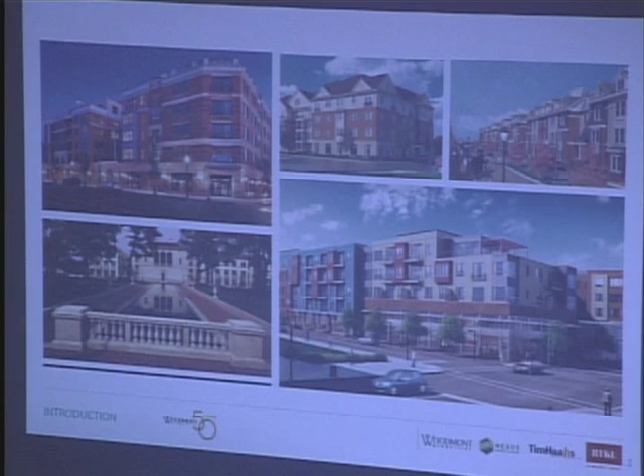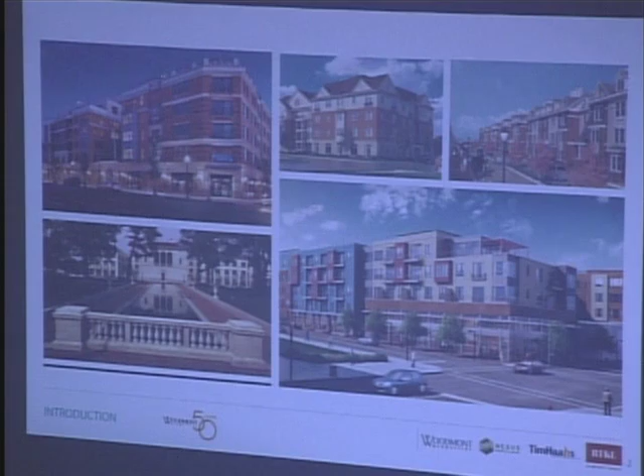One of the nice things about doing a project like this is that it's a big parking lot—it's generating lots and lots of traffic in your community, really with not too many other benefits. Maybe somebody stops at the local pharmacy on the way home, but there's a lot of folks coming in and out of town at the AM and PM peak. So we're not taking an old closed-down warehouse or a building that hasn't been in service for years and introducing all this activity.

In fact, what we're doing—and we have traffic testimony to this point—is it's really traffic neutral, but we're getting all of these other advantages.

The tax base, the exciting new retail, all of the shoppers who will be coming into the downtown, eating and drinking and having fun and spending their money here, as well as the purchase price, which is not insignificant, to the parking authority for the land.

We'll also be creating literally hundreds of construction jobs along the way and a host of permanent jobs as we go forward, not only with folks that will be full-time managing and so on in our part of the community, but also all the folks working in the retail and so on.

Just to demonstrate the level of commitment we have, we're on the agenda in August to transfer a liquor license in Metuchen that's currently not in use, because we really see this piazza and this retail as a great place for outdoor dining and a nice restaurant, bar environment. So we're already out there making investments on the hopes that we're able to move forward here quickly.

Just a short note, because I don't think we're going to cover too much with regard to all of my communities, a few quickies. First of all, you'll see the amenities package with our architect, Keith Campbell. He's actually flown in from Chicago to be here tonight.

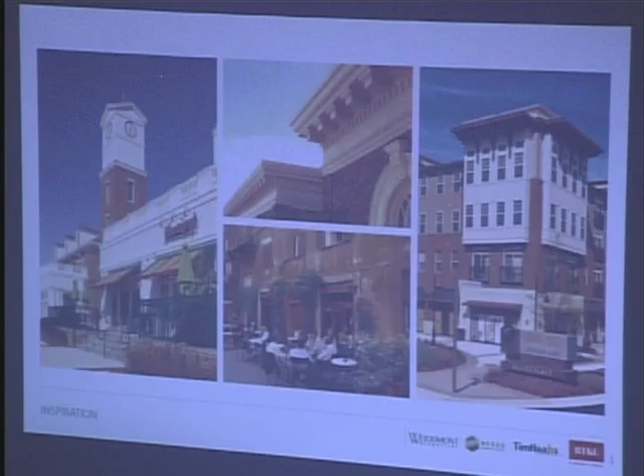A little more inspiration, upper left, buildings we admire. A nice example of red brick, carefully detailed masonry, projecting white trim, a nice deep cornice, a keystone at the top of each arch, white windows and mullion bars. It's a good precedent.

Again, another example of integrating private and public spaces, a projecting private balcony overlooking the public space, which you'll see examples of in our drawings. On the right is a landscape trellis. A big part of our design is an outdoor space above retail, and we're proposing a landscape trellis not unlike this one.

Lower left is another example of a very successful public space. It doesn't try too hard to do too many things, which is why we like it: nice low planting within planters, some mature trees providing shade, simple but high-quality paving underfoot. It hasn't been over-designed, which allows for a lot of simplicity, and simplicity allows flexibility, so the piazza can be used different ways depending on the event.

Lastly, this picture on the right shows ground floor residential units adjacent to a sidewalk. We've got that situation on both the east and west buildings in our design, which is actually a positive benefit to the public space. But exterior patios like this need to be protected, and we're proposing a solution like this picture, which protects the patio space with a low masonry knee wall, maybe a little wrought iron on top, and extra foundation planting that softens the transition between sidewalk and private space.

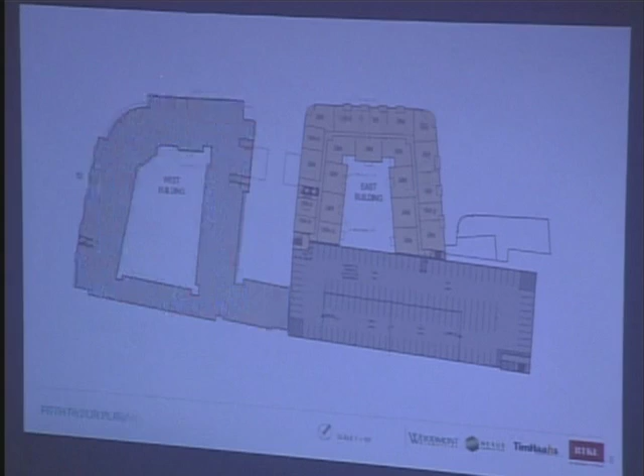The 5th floor is where the top floor of the east building is. It's 1 level higher than the west building. We have a total of 273 units across the entire project, 41 COAH units, and the rest market rate.

Building heights: east building 58 feet to the top of structure, west building 47 feet to the top of structure. Both buildings have a decorative parapeted cornice that hasn't been pinned down exactly yet, but probably 4 to 5 feet. That does a number of things for us, including screening any mechanical units that are on the roof.

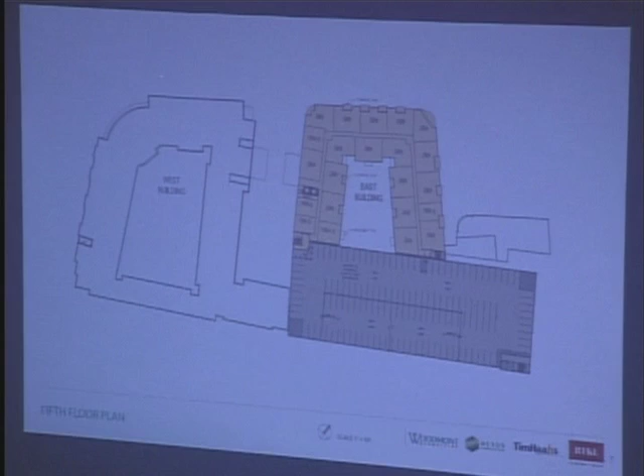It also allows, in instance of a larger event, if you were to close down Pearl Street and New Street, the piazza to kind of spill out all the way across the street.

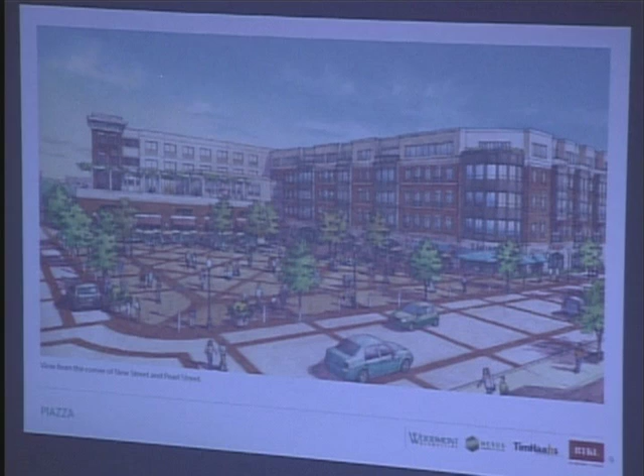Okay, we're over at the west building now, corner of New Street and Lake Street looking east. What we're looking at here are, in the foreground, the west building, with a little bit of the east building in the background. Again, we'll see this consistent cast stone base across the lower floor of both buildings.

The west building is 4 levels, so there's 2 levels with masonry above that, and then a composite panel at the top level. Like the east building, there are private terraces cut into the edge of the building. Up here you can see a little wrought iron rail at the quarter circle where it turns the corner. Some big terraces—these lucky residents get a lot of exposure to the street there.

Down at grade, these ground floor terraces show the consistent low masonry wall across the front here, as well as on New Street all the way down to the corner.

I should mention the coloration differences on these two buildings too. They're similar buildings, like maybe siblings—not identical twins, and we don't want them to be. You can see the difference in coloration of these projecting bays on the west building versus the dark color corners and bays on the east building. There's a slight difference in masonry color between east and west. We like that similarity and consistency, but we don't want it to be the same across the entire length of the block.

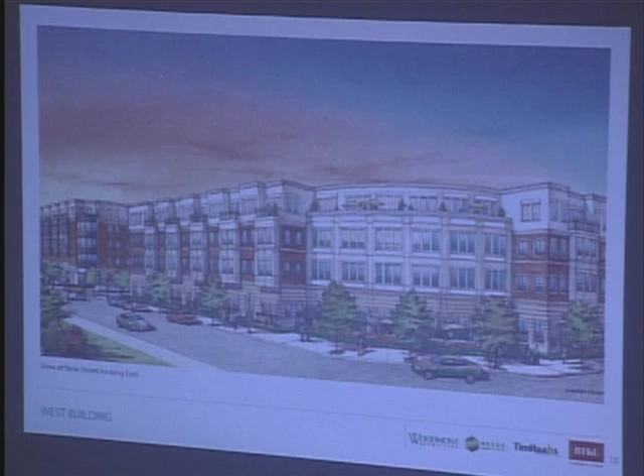Just a few words about sustainability. We consider ourselves not only stewards of the block and the urban design, but also stewards of the environment. To that end, I wanted to mention a few of the things we're going to be doing in terms of green design and sustainability.

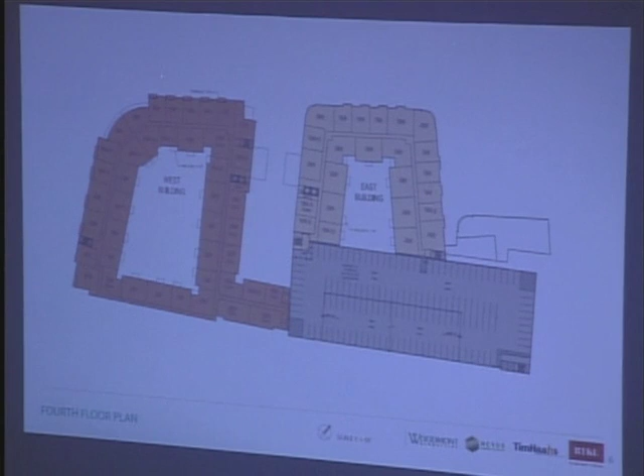Just one last question - is there a basement in either the east or west building? No basements in either building.

Okay, board members, your questions for the witness?

I do. Mr. Campbell, how do you access the rooftop of the retail building? That is through the amenity space, access off the third floor of the east building, so the path of travel is back to the outdoor space.

So you come through the east building? Correct. And is there an elevator in the east building between the first and second floor, and then you get out of the elevator on the second floor and walk to it? Yeah, there are elevators in both buildings that provide access to all floors.

Okay, other questions, board members? Just one other question about the rooftop terrace - do you anticipate that will be used by the retail use on the first floor, or patrons of those retail uses, or is it mainly for residents of the building? At this time, we anticipate it being used by residents of the building only, and it is accessed through what we think of as the fitness club or amenity space off of the third floor.

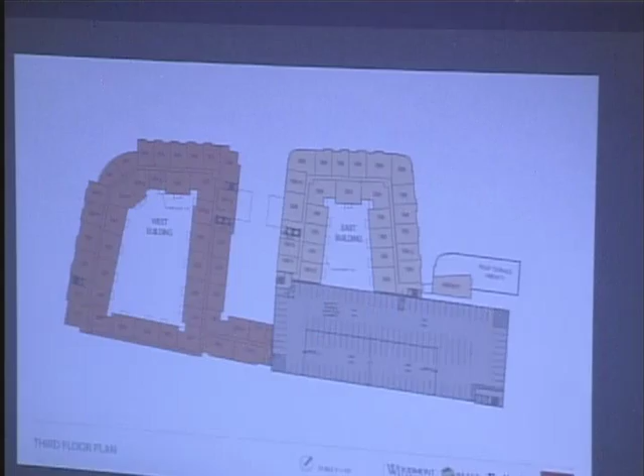There is access around each surface of the east and west building here, as well as Grove Street at the garage, so I think that's probably adequate for those surfaces. As far as if there's a necessity to get into the courtyard building, we have provided for the ability to get through the back house area into these courtyard areas. So then there's access in case. Okay.

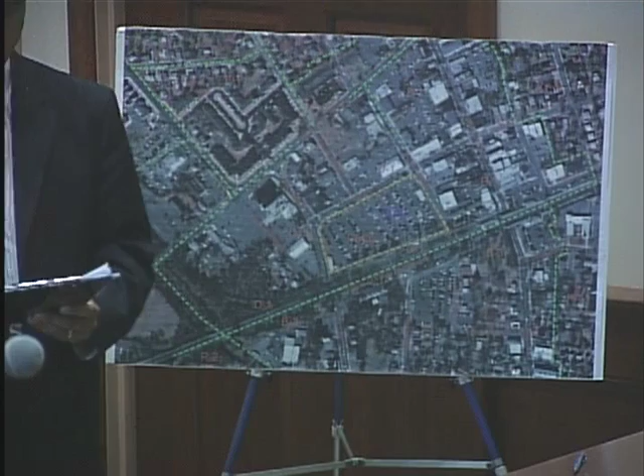To recap from the previous testimony by both Woodmont Metuchen and the project architect, the project proposes a mixed-use residential community in Metuchen consisting of the following elements: a 4-story west building with residential apartments, a 5-story east building with ground floor retail and residential apartments on the upper floors, a single-story retail building, a parking garage, as well as a community piazza along the northeast corner of the property.

The first exhibit I have here is an aerial exhibit, just to orient you where the property is. It's centrally located in the borough of Metuchen, along its eastern side. It has frontage on Pearl Street, to the north along New Street, to the south the railroad, and along the western side is the Lake Avenue right-of-way.

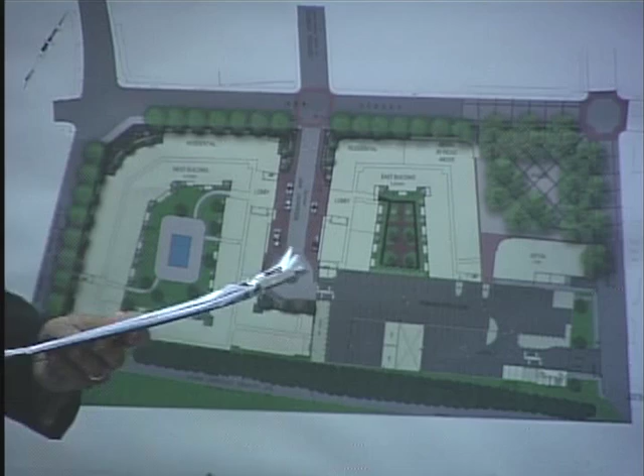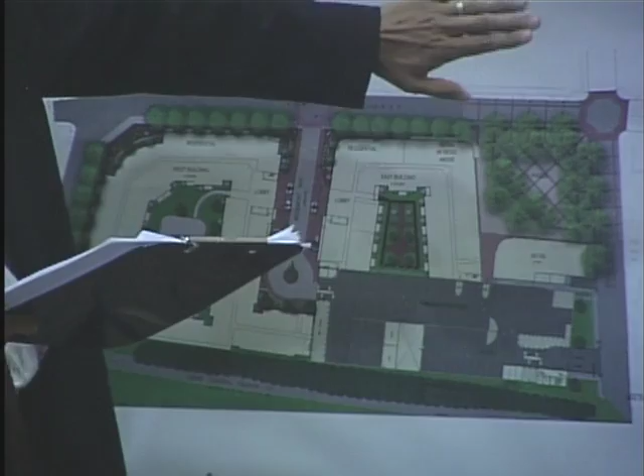So right now, the property is accessed via two driveway entrances: the first being directly opposite Center Street, the second located on the southeastern corner of the property near Pearl Street. The adjacent properties consist of the train station to the south, a ShopRite liquor building, parking lot area, as well as a precision repair building immediately to the north beyond New Street. Over to the east, there's a Wells Fargo building, as well as an existing restaurant and additional 1 to 2 story buildings, and across Lake Avenue there is an existing vacant retail building.

Now, as mentioned before by the attorney, we are here before the board this evening seeking two things: preliminary final major site plan approval, and approval of a subdivision plan for the property. Now I'm going to switch boards again, switch it to one more board.

We'll mark this A4, please, which is the subdivision plan.

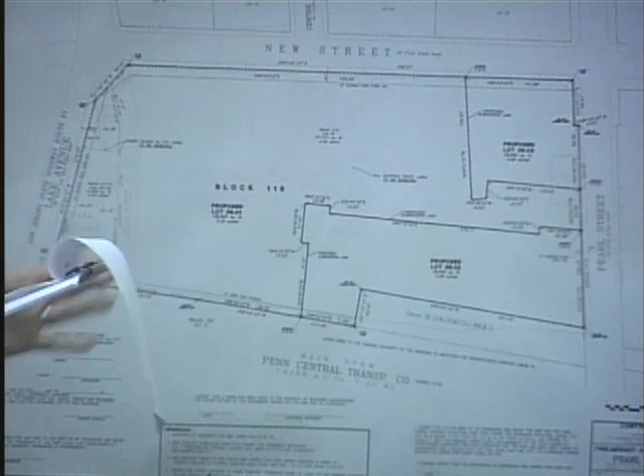Switch again. Tony, can you describe briefly what we're proposing to do? This exhibit was actually prepared by the project surveyor as a preliminary final major subdivision plan.

The project architect in his earlier testimony had discussed the proposed buildings to you. What we wanted to do is relate them to the subdivision.

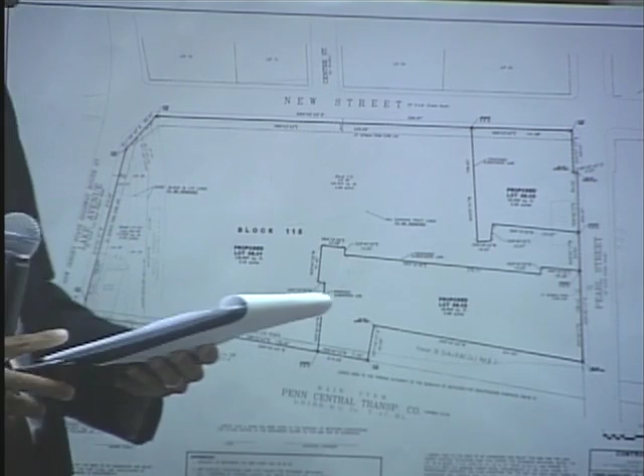The property is being consolidated; the proposal is to consolidate this property into 3 lots. The first is Lot 36.01, Block 115, and this particular block will include the 2 proposed buildings as well as a freestanding retail along Pearl Street.

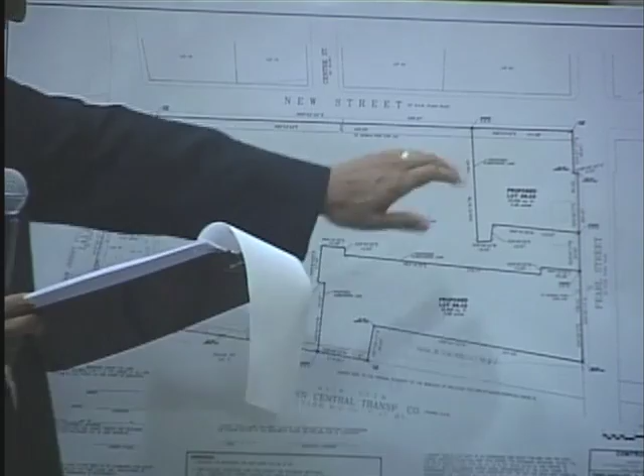Lot 36.02, Block 115, will include the proposed parking garage. And the remainder, Lot 36.03, Block 115, will include the proposed piazza area. I'd like to note that all 3 proposed lots will be conforming upon conclusion of the proposed subdivision.

Sure. We're going to keep nagging you - hold that microphone closer up towards your face, a little bit higher up, and they'll be able to hear you better. Okay, thank you.

So now I'm going to switch again, back to A3, which is the rendered site plan. That's correct.

In terms of the preliminary and final major site plan approval we seek this evening, this project is a planned unit commercial development, otherwise known as a PUCD, which is a conditional use in the D1 Downtown Development District. The Borough Ordinance, in section 11091 FB, puts forth 4 specific conditions the project is required to meet.

The first is that the minimum tract area has to be 4 acres, including any new street. The property as a whole is a 5-acre tract. Also, the tract has to have frontage on New Street and Pearl Street, which it does.

Third, the tract has to be within 200 yards of the Metuchen train station building on the northbound side, and the tract is within that distance. The 4th item is that a common open space in the form of a town green shall be provided in the approximate location shown on what's called a regulating plan. The project does propose a public piazza in that area as required.

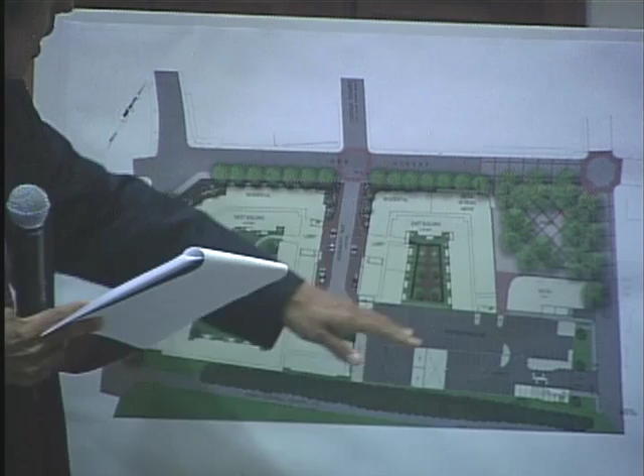It has a 40-foot minimum lot width requirement, and a substantial 596-foot dimension is proposed. We have a 100-foot required lot depth because of the D1 zone; 287 feet is proposed. The rear yard, 10 foot is required; 12 feet is proposed.

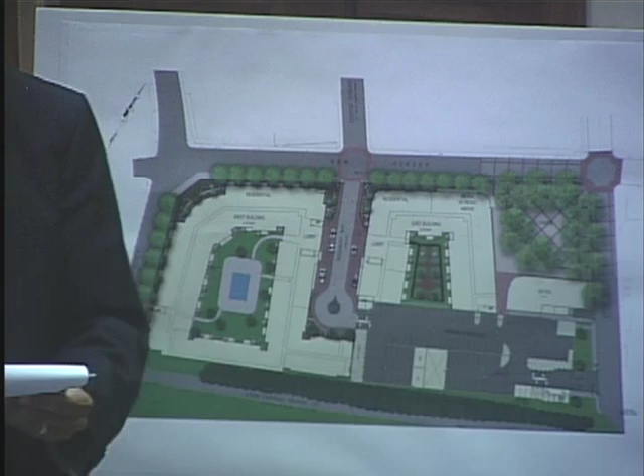There are curb setback requirements. The Pearl Street building, no taller than 2 stories, has a 10-foot minimum required - we propose that number, 10 feet. There's a building 4 stories or more for all streets, 20 feet are required, we propose that number. There's one other case considered for all other cases, which is not applicable in this particular project.

There's a maximum building coverage required as a percentage of lot area - 70% maximum, we propose 40%, so we meet that requirement. There's a maximum impervious coverage, also as a percentage of lot area, 90% is the maximum allowed in the D1 zone; 85% is proposed. There's a minimum public open space requirement of ½ acre, and we do meet that with the proposed public piazza area.

There's a maximum height requirement. Now I'm going to switch back a bit, and I need to bring back the first exhibit to clarify something.

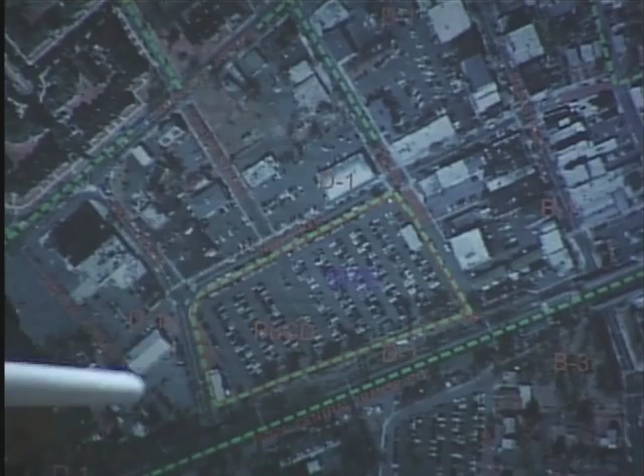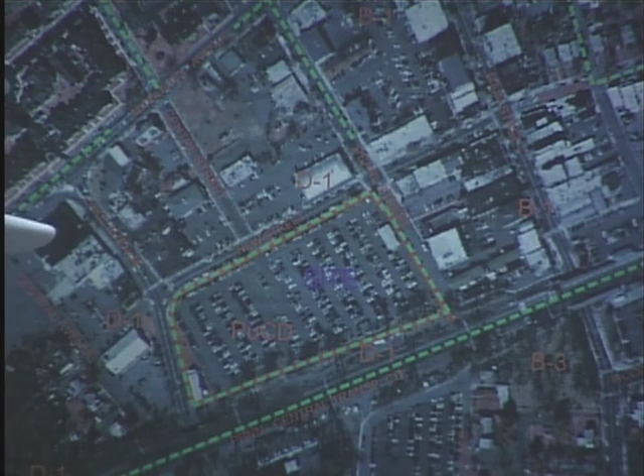In this first exhibit - the reason I mention this is the actual overall parcel for purposes of determining maximum heights. There are 3 subparcels, which I call parcel A, B, and C, as part of the regulating plan. The parcel A area is essentially the corner comprised of Lake Avenue and New Street intersection - there's a sliver of property there.

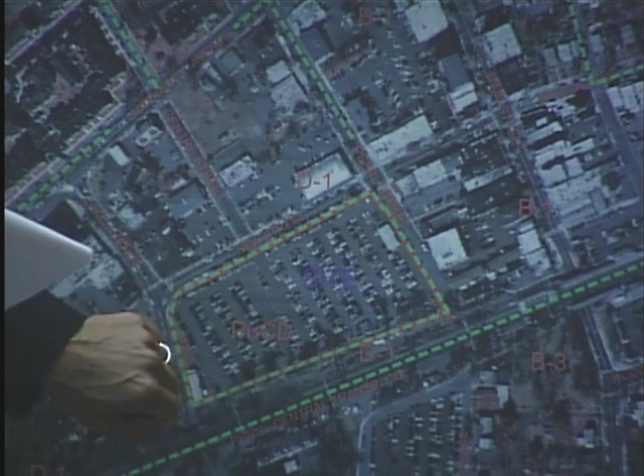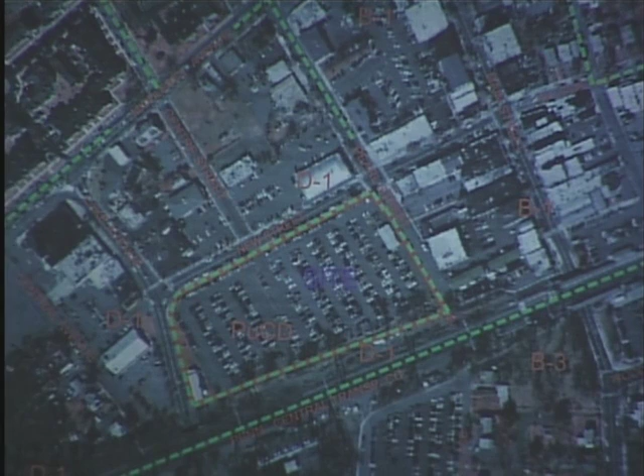Parcel B is a section located on the western side of the property; essentially it bisects the property. Parcel C is the remainder on the eastern side, and there's some differences there. So, for all three parcels, we do meet the maximum height requirements.

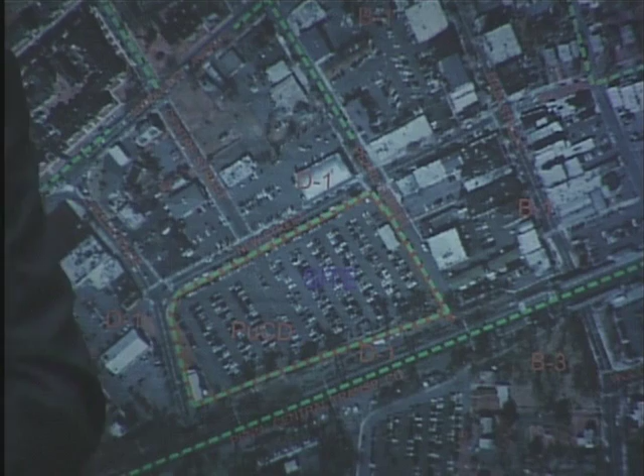Want to briefly go through the site layout? Sure. Let's switch back again.

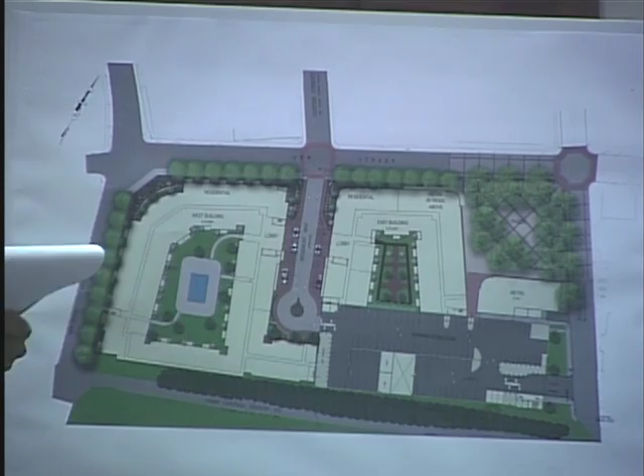In terms of site layout, both the west and east buildings will have main access from the proposed Woodmont Way, which essentially bisects the property and provides access to the fronts of both buildings. The retail component of the east building will have access from the east side, from the piazza side. The proposed freestanding retail building will have access from Pearl Street.

There'll be vehicular access to the proposed parking structure, located on the southeast corner of the property, from both Woodmont Way and Pearl Street. Parking for this development will be shared with commuters via this parking garage.

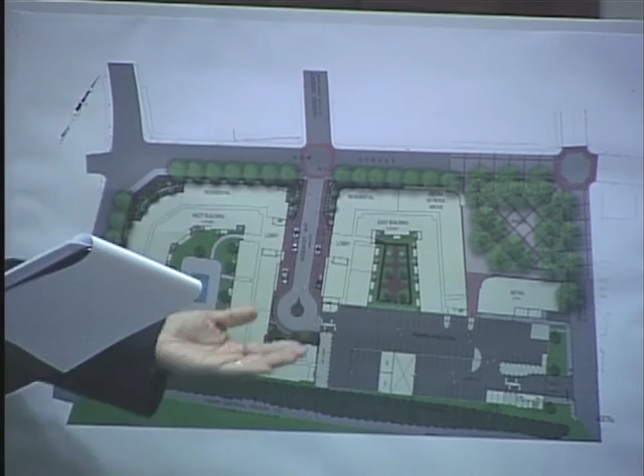There will be a 10-foot wide concrete walk and landscaped area along the Lake Avenue and New Street frontage. This concrete walk will be in accordance with borough standards.

In terms of garbage and recycling operations, these will be collected via a private service. There will be back-of-house service in both proposed residential buildings.

One other note: during construction, the site will have construction fencing with signage and scrim on it. We understand that this particular item will need a design waiver, and at this point I'd like to request a design waiver be granted for that element.

In terms of utilities, storm and sanitary sewerage, water service, gas and electric are all fortunately located adjacent to the site. Based on recent discussions with the borough engineer, it is our understanding that there is adequate capacity in terms of both water supply and sanitary sewer systems to serve the project.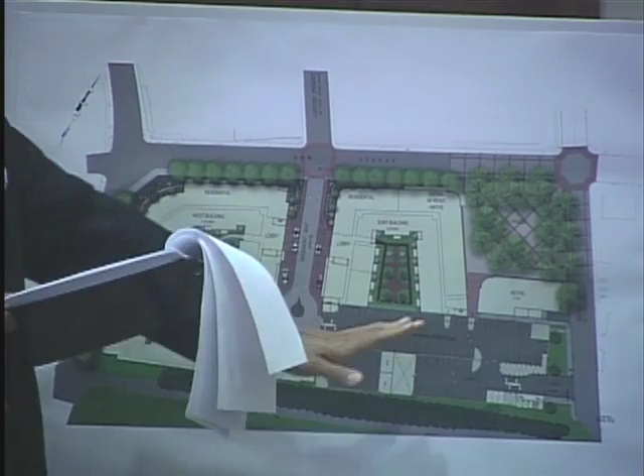Changing focus a bit to stormwater management and drainage. The topography of the property generally slopes in an east to west direction, primarily towards the Lake Street, New Street intersection.

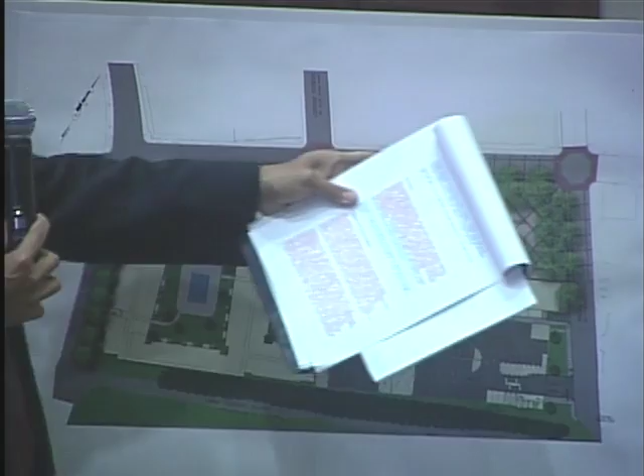What happens when it rains is runoff flows off the paved surfaces, goes through breaks in the curb along the edges of the parking lot, and ultimately into inlets that feed into a sewer trunk line that goes under New Street, flowing towards the west.

Since the property is considered a major development because it proposes to disturb more than 1 acre of area, it has to meet certain requirements, including what's called quantity reductions. In other words, you have to look at the volumes and peak flow rates of runoff for certain storm events to make sure it's not creating a negative impact to the receiving piping. So we looked at this analysis.

We determined that, based on a comparison of the existing and proposed impervious surfaces, meaning buildings and pavement, the development will actually reduce impervious coverage by 0.77 acre. That means approximately 15% of the overall site area.

That allowed us to quantify the overall volume reductions for certain target events, for example the 2-year, 10-year, and 100-year storms, which are part of the land development ordinance in town as well as state requirements. We determined that the development would reduce these runoff volumes by about 25% for the 2-year, 10-year, and 100-year storms.

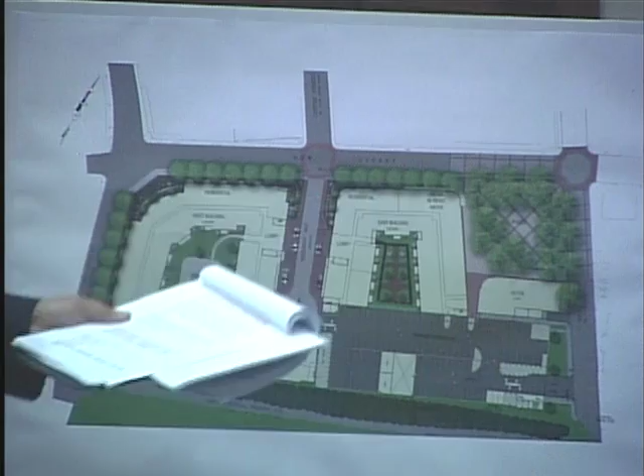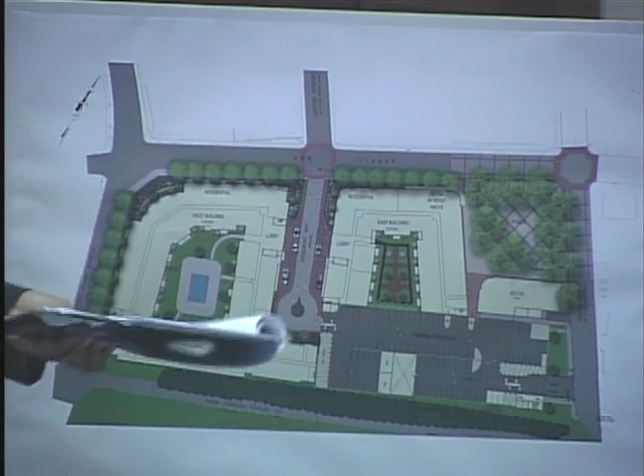Bottom line is, we looked at this system and determined that when you have substantial storm events, even connecting into New Street, assuming worst case scenarios where the piping underneath New Street had a surge in it, we weren't going to create a negative impact to the inlets. In other words, create a situation where you're creating geysers. That's always very important. We want to make sure we're not adding to situations downstream. Flooding is a very important issue, and we want to make sure we're not exacerbating any negative impacts.

So to conclude, we are creating a positive impact by not generating additional volumes and thereby worsening any flooding conditions.

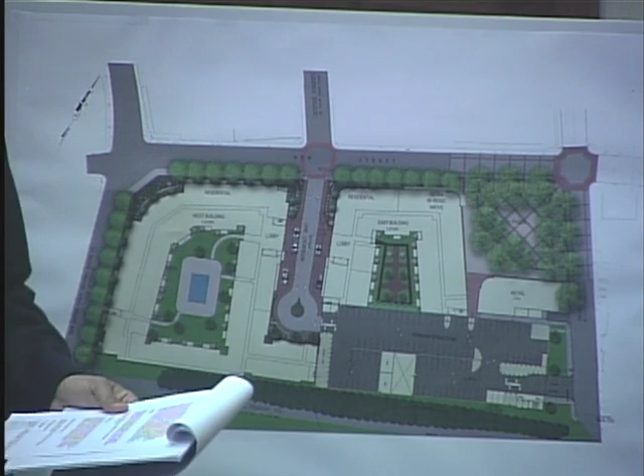And Mr. Castillo, to your knowledge, did the planning board engineer also review the plans relative to the stormwater management system? Yes. Did they conclude that our development proposal as proposed would in fact meet the stormwater management requirements of the borough? Yes, the borough engineer did agree with our statements.

To switch gears, I wanted to discuss briefly lighting. The project will utilize essentially a Main Street style street lamp in accordance with borough standards, and final placement of these lamps will be coordinated with the borough planner.

Also in terms of landscaping, the landscape plan as shown on our plans at this point is illustrative, and we will coordinate once again with the borough planner to finalize placement of these street plantings for the project.

And in terms of the piazza itself, Tom Carmen, landscape architect from Little Barrow, will provide some descriptive testimony regarding it.

Did you have an opportunity to review an engineering review letter from the borough, from the planning board's engineer? I did. Do you have any comments to put on the record relative to that letter? In general, we took no exception to the letter. There were some minor items we did take exception to, only a few of them.

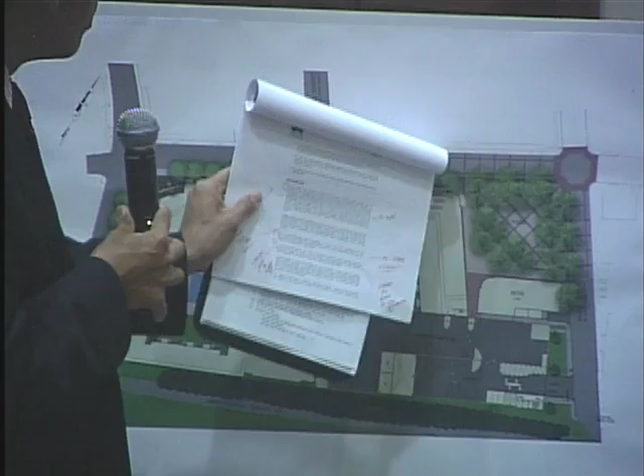The next is, I would say, clarification and perhaps a comment on number 3 regarding the width of pavement of both New Street and Pearl Street being milled and overlaid. So Tony, if you could describe what we're proposing as it relates to the milling and overlay. Right now, the proposal is to perform mill and overlay in the areas along Pearl Street and New Street that are immediate, that will be given additional surface treatments adjacent to the piazza areas. We feel that at this point, the balance of Pearl Street and New Street, the condition of that pavement does not merit a full mill and overlay at this point, based on its current condition.

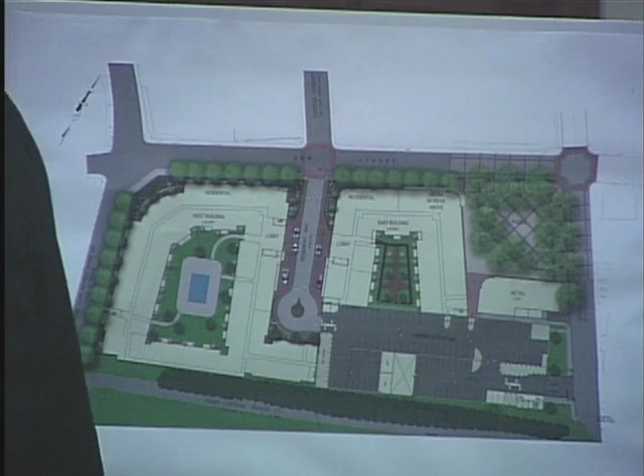So you're proposing this with respect to New, and what about Pearl? All of it. All right, so all of Pearl you're proposing to mill and pave or install improvements in the roadway, is that right? Yeah, Pearl from the end to New. Right, and New—

Is it your proposal that the areas shown in gray, not outlined in some fashion, are adequate and will remain that way as a result of construction, and that the applicant shouldn't be required to pay for milling and paving of those areas, is that right? That's our position. Same position on Lake Avenue? Same with Lake Avenue. Well, Lake Street. Lake Street, right.

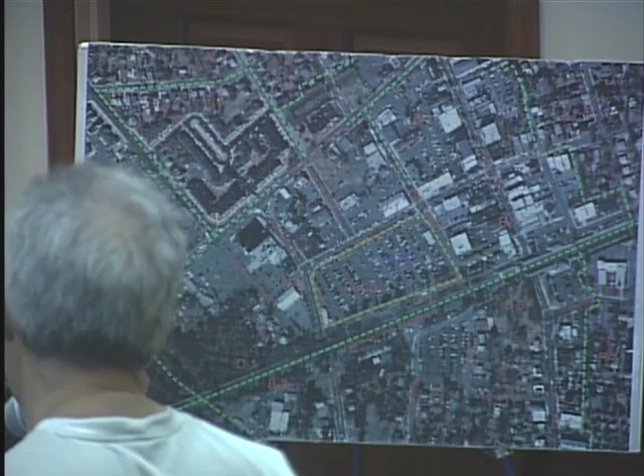So will that be addressed at some point through this? I guess the concern would be to do all this nice development of yours, and then your neighbors down the road will also be constructing and placing all this new development into an area which already has a chronic flooding problem. Not to mention the issues about moving heavy machinery over the road. I know you're talking about remilling the surface, but all that activity may damage the pipes further underground. So I'm just raising this as a concern, wondering if there's been consideration of those cumulative impacts that might exacerbate it. You just don't want to have a problem when you go ahead. It sounds like a nice development.

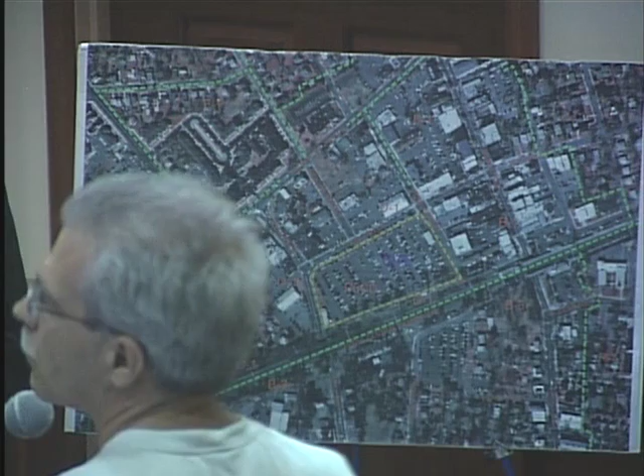No question that we'll have to give it a little bit more of a look, but what I can tell you too is you're only as good as the next pipe. So to the point earlier, you're surrounded by bad pipes, unfortunately, my friend. If we were to put in a new pipe that was 50% bigger than the existing pipe, if it flows into an 8-inch pipe, it's going to surcharge no matter what happens. It's a system.

Well, the good news is, just local knowledge, you're in luck in a way, because just on the other side, past Borough Hardware, is where much of that water flows into the Dismal Swamp. So it's not that far to the ultimate egress of the water. And there is a plan to improve that. In fact, we've already debated this fair share issue. Yeah, and I don't know the background, so I'm not going to get into that. I know some of the applications downtown to bring a bigger quantity there.

So where is the boundary and who does what? It sounds like an issue I'd like to bring to your attention, not being from the town. You may not know it's been a chronic problem. Just behind you on Main Street, any half-decent rainstorm and Main Street closes, so whatever pipe is behind you floods. You've got flooding behind you, flooding around you, you're kind of a little island there, and then you're going to run all this equipment over the street. Good luck with that.

Thank you. Other members of the public would like to ask questions relative to site engineering? I want a discount.

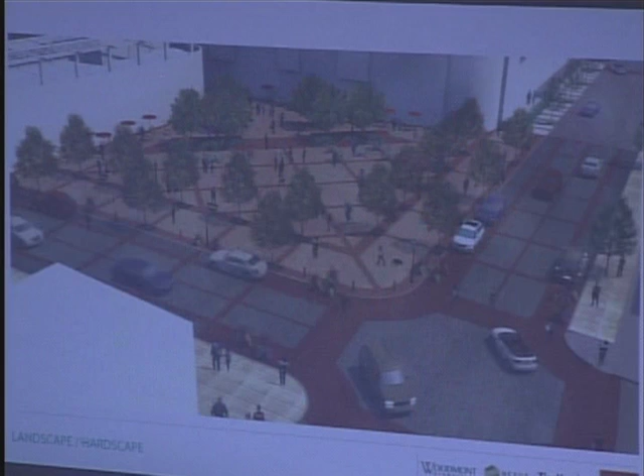This is a perspective image looking back at the architecture and the retail, at the intersection of New and Pearl. This shows how we're really extending that piazza out to the roadway.

The patterning of the pavement in the piazza extends out, and the patterning within the road designates parallel parking spaces as well as the crosswalks. This textured pavement within the roadway relates to the earlier discussion about milling and repaving.

What this is, is a specially formulated polymer cement product that has aggregates, pigments, and engineered fibers in it. It's put down in this pattern over the asphalt, and it's an extremely durable surface, durable to freeze-thaw, petroleum, and salts.

It's used in a number of applications throughout the state, including Chatham. It's actually been established in Jersey City as their standard for crosswalks, medians, and decorative intersection treatments like this. That one intersection in Jersey City sees about 60,000 cars a day going over it. It's also used by NJDOT, and we all know how rigorous NJDOT is with their detailing, so it's a great product for this.

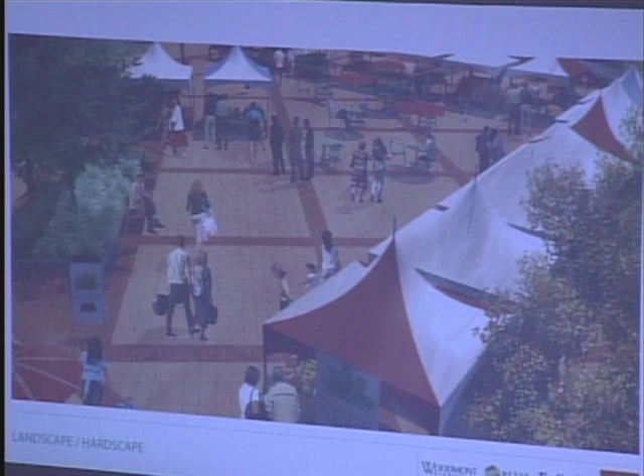Then a larger scale event, again with flexibility being one of the key components to the design of the piazza. A larger scale event could be something like this, where we're closing off New Street right in this location.

And it could be closed off down at the end by Central. So just this area could be closed.

Could be a street fair happening there with some food trucks along the curb, some street fair tents, and then potentially set up a stage in this orientation.

Again, flexibility—there are many locations that a stage could be set, but this orientation right here, we felt that Pearl Street could remain open and provide access to the garage.

Have a stage, line up some chairs, the retail being vibrant, people milling about.

Another possibility would be to close both streets down. Certainly a stage could be located here where you could fill the whole space with a lot of people enjoying an event.

A smaller scale event, keeping the roads open—a stage could be located right here, and some seating directed at that.

Flexibility being the key, and I think we've really achieved a good balance of that here.

The next view would be from the food truck over here, kind of looking back at the stage.

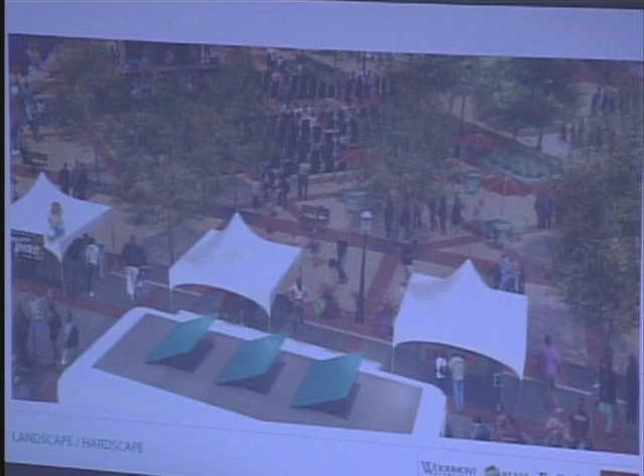So right here, we see New Street in the foreground, that flush curb that we spoke about, the paving pattern delineating where a parallel stall would be.

The Metuchen-style light, planters, tree grates, taking that vehicular pavement and carrying a similar patterning into the plaza space.

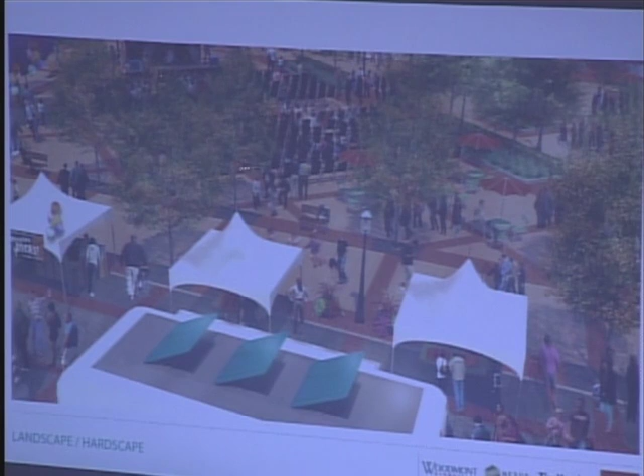The movable seating or actual arranged seating for an event in this location right here, looking at a stage. Retail frontage over there, and then the honey locust with a simple underplanting.

So in general, that concludes my direct testimony on the piazza. I think it's going to be a great space for the community to really enjoy and have a bunch of different events, the Junebug Festival and all the different things that happen.

Good, okay. Board members' questions for this witness? Right now—and I don't know, Mr. Carmen, if you're really the person who can answer it—but right now we have on-street metered parking.

None of your lovely renditions show the meters. Are they going to be removed? Is there going to be on-street parking? Do you anticipate on-street parking available on Pearl and New Streets?

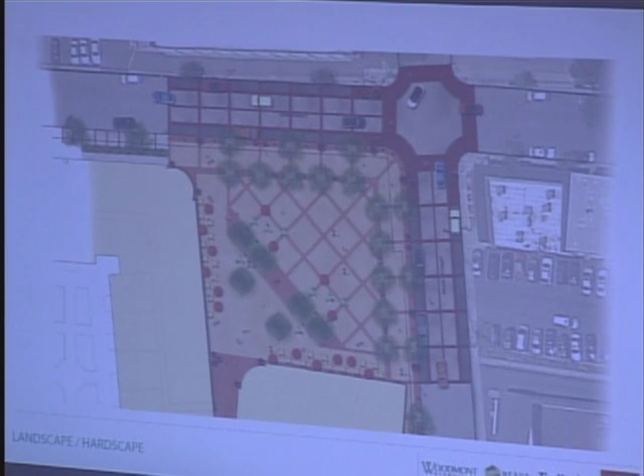We do envision that this would be parallel parking along New and along Pearl, and the parking meter could be yet another element that creates that kind of edge treatment. So in some of these locations, maybe instead of the bollard, it's the meter there.

So if the meters remain, you would work around them? Because obviously the ground treatment, you're showing going to the other side of the street. That's correct—this curb line right here would be the existing curb line.

So today there's parallel parking, I believe, on New Street, and that would remain. It's just that it would be detailed on the ground plane differently. Right, okay.

Okay, thank you. Okay, board members, other questions for this witness?

Okay, seeing none, I'm going to open the public portion. If you have questions regarding the landscape architecture, please come on up and share them with us.

My name is Henry Chang. I live at 112 Lake Avenue. I'm with the Arts Council. We're very excited about this open space for arts events within town.

I have a couple questions for you. The first was related to how many people you would envision could fit into that central area. For instance, with that rendition of the stage and chairs set up, what was an approximate volume of people?

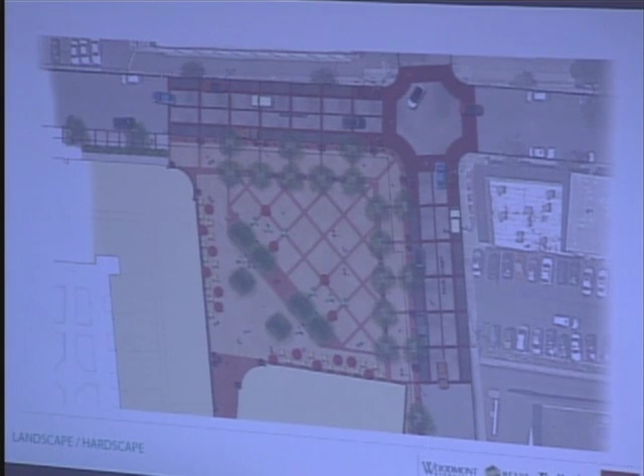And maybe during a performance, some people's line of view may be impacted by the tree, but I think we've struck a good balance in terms of that.

Sounds great. Can you talk a bit about the paving materials? You mentioned pavers as the stripe aspects, but what are the larger beige areas? This whole area is a paver field made up of two types of paver - a more neutral colored, lighter toned paver, and a reddish brick-like paver with a smaller module in the pedestrian area.

Let me add to that. The neutral tones will be closer to a 1 by 1. I'm on the Downtown New Jersey Executive Board, and as everyone moves forward with sidewalk improvement programs, a lot of brick or smaller paver styles create an uneven rattle with a stroller, skateboard, or bicycle. So we like the idea that some larger spaces will use a bigger paver to create a more even space for folks riding a bike or pushing a stroller.

And you're suggesting a 1 by 1 foot dimension? Yeah, it would be 10 inch by 10, something like that. The red banding would be more traditional brick.

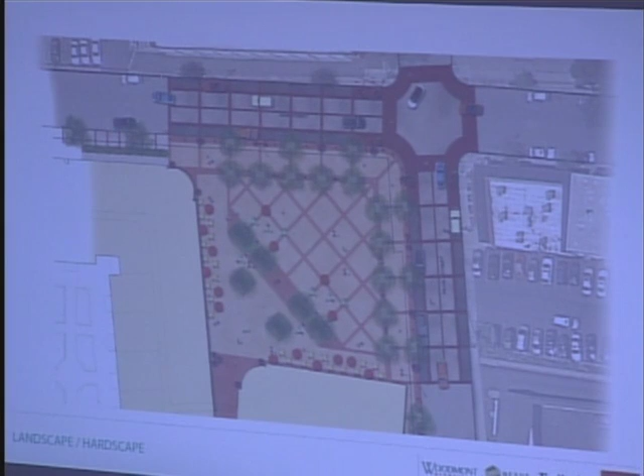Okay, and lastly, this maybe is not landscape per se, but it relates to the piazza. As far as height, it looks like it's just the one sloping space down toward the street side of things. Was any consideration given to slight variation in height, or a little step up, little artificial benches where you can sit, where it perhaps delineates the retail space or the restaurant bar area up top, like you see in a lot of public places similar to this?

The answer to that, I think, lies a lot in the liquor license laws. If you're going to expand your liquor license outside your space, it has to be carefully delineated. When you walk in Manhattan or Hoboken, they either have like a velvet rope set up, or they get a fake picket fence or whatever. So we want to create as much flexibility in that area if they want a little bit more or a little bit less. For instance, in one of our projects out in Green in Morristown, one owner did 2 restaurants, and to our surprise, did great outdoor stuff at one and decided he didn't want it next door. It just didn't fit his whole motif and what he was doing. So the conversation we've had for the last 18 months has been about flexibility.

No steps, no permanent benching, because we're going to all live with this for 30 years. And in 20 years, who knows what might be all the rage. Put a fountain in the middle or that kind of thing.

Yeah, I would agree with the general sense that you want to have flexibility. I guess the only point, I'll phrase it as a question: is it prudent to give thought? We spoke to, 330 days a year, it's for pedestrians. You want to draw people in to hang out in the space. And usually, as a principle of design, variations in height, even if they're slight, create that coziness, that intimacy in pockets of space where you can be, even if you're 3 feet above the guy sitting right in front of you, you have that delineation, and you're not right on top of each other. So it's just something I would put out there. It's definitely an interesting thought. I think we'll look at it. If we can do it without moving away from the flexible concept, it's something to think about.

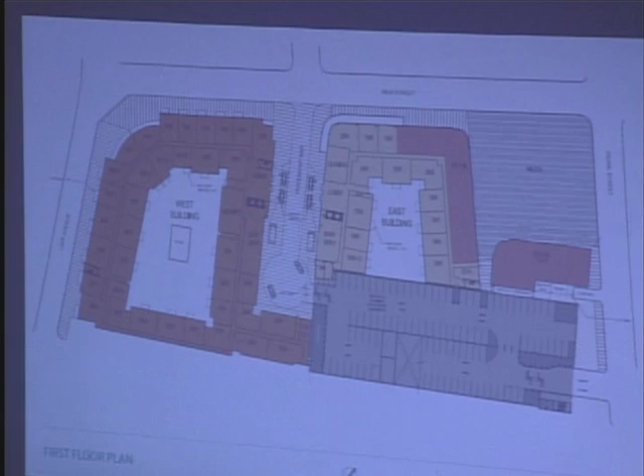At the entry and exits, it's very important to have approximately 40 to 50 foot candles. You have to make sure that, especially upon entry, there's a light transition—so when you go from sunlight into a parking structure, you pass through an area that's somewhat well lit before proceeding into the garage, and that way you avoid the blind spots you typically get.

The overall height—I mentioned 14 foot, 11 foot on a typical level—so from grade to the top level parapet is 56 feet 6 inches. The top level parapet is 3 foot 6 inches above the top level of the parking deck. That 3 foot 6, or 42 inches, is the code-required fall protection.

We are proposing, which can be spoken to by Nexus a bit more, an operational office in the northeast corner that would basically secure the garage, with the garage manned on a 24-hour security basis, as well as active security measures. There will be cameras in the garage as well.

The pedestrian connection - I mentioned each stair tower as an access point, with 2 elevators required per the requirements of the use and demand of 750 cars from a residential and commuter standpoint. One of the elevators will accommodate a stretcher per accessibility requirements.

The pedestrian connections to the residential are in 3 locations: one at the southwest corner to accommodate access on each level of the parking garage to the adjacent west building, and two on the northerly portion to accommodate access to the east building. In both cases, they access into a small lobby corridor space.

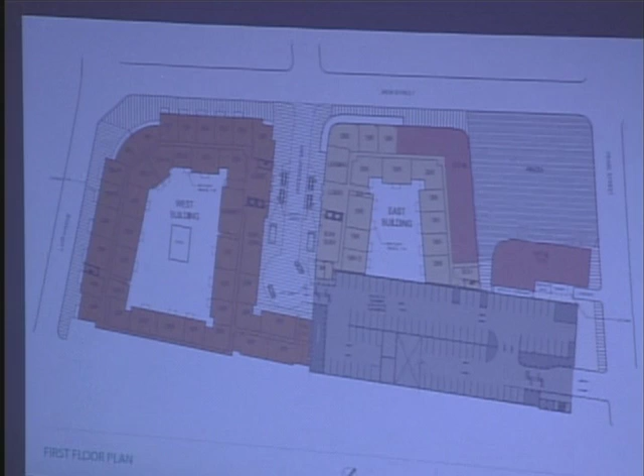Moving up the typical levels, the vehicular movements are fairly straightforward. You come into the garage and go up the ramp. On your way up, you make right-hand turns to park. On your way down, you circulate in a counterclockwise fashion - very user-friendly. We try to minimize as much as possible any vehicular or pedestrian conflicts within the parking garage.

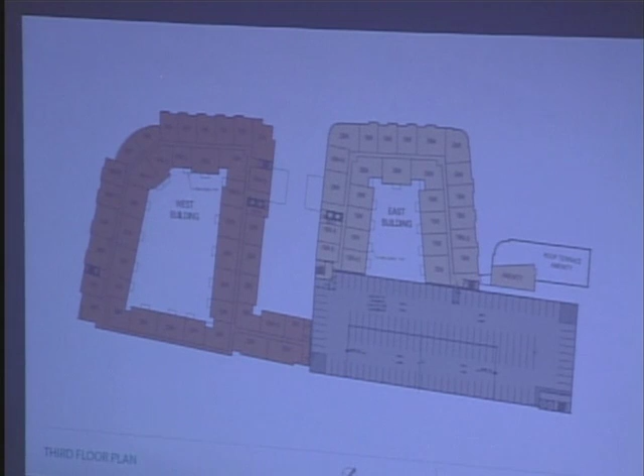The interior wall here is a stack wall. We try to maintain as many openings in it as we can from a structural standpoint, so that if you're on the ramp, you still have visibility down to the flat bay, and you feel comfortable within the parking garage.

From an architectural and elevation standpoint, as Keith mentioned earlier related to the architectural intent, the parking structure is contemplated to be a precast parking garage. The precast materials contribute to sustainability. You can see in this corner it's typically going to be a buff color precast with thin brick inset, strategically located at the corners and stair tower elements.

The other thing I wanted to mention is what's called a shear wall. You may be in parking garages where you see internal walls, but to enhance passive security measures, we try to minimize interior walls as much as possible and bring those out to the exterior as an architectural element. You can see the verticality in the architecture at this end piece, giving substantial architectural intent - the stair elevator tower in the back, and the vertical shear wall on the exterior. So inside, you essentially just have an open wall, really no columns and no walls, which is great from a security standpoint.

We would expect, although not designed yet, some signage identifier for the parking garage. As you come down Pearl Street and Woodmont Way, we'd want the public and commuters to visibly see very tasteful parking signs. Although not shown here, that is one element forthcoming in the design.

Mr. Chair, if possible, before we take questions, Mr. Germano from Nexus would complement Mr. Helmer's testimony. Perhaps I could have him speak operationally and then take questions about the parking structure as a whole. Counsel, do you have any objections?

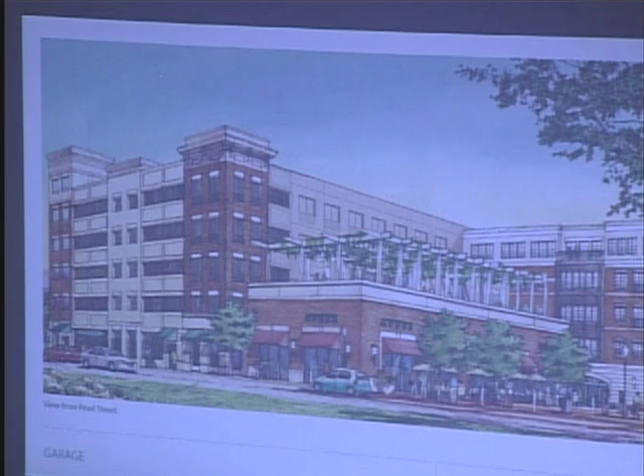No objections, if it's all right with you. Well, I see Mr. Germano was only scheduled for 5 minutes - that's the only reason I'm considering it. It's okay with you, it's all right with me. Be brief - we'd like to call Dante Germano. None of these times have been... Eric, can we ask questions? We can do whatever we want. The idea is the board isn't supposed to consider new testimony after 11, so we can make a brief extension. Let's hear from Dante, and then if we have questions, let's do the questions. I know we'll go over the 11. We all have questions for Mr. Helmer.

Before we move on, I just want one question from Mr. Helmer regarding the stall sizes of the parking structure. Currently in the parking garage, the stall width is 8'6", which is typically standard size within parking garages. In many garages we've done throughout New Jersey accommodating commuter, residential, or other uses, the borough requires 9 foot, so that's an area we would require a waiver for. The stalls are 8'6" by 18 feet deep, and the 24-foot drive aisle adheres to the borough ordinance.

Okay, don't go anywhere, Mr. Helmer - we have plenty of questions, but we'll hear from Mr. Germano.

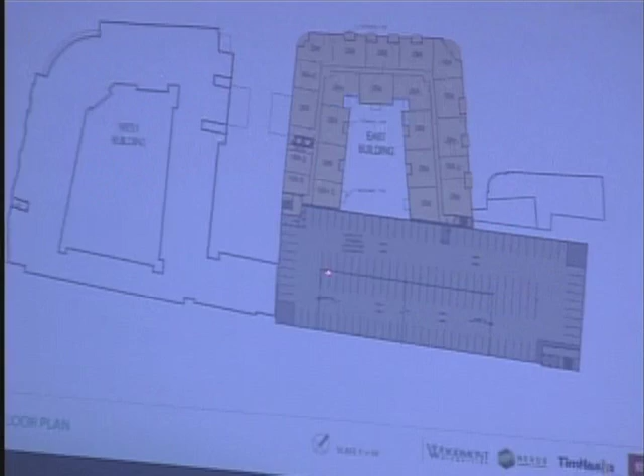The other thing to mention is that on the top level, the light fixtures, we do not mount those around the perimeter. We mount those on the interior column line. Okay, so we won't be seeing any shoeboxes up there anytime soon. No, it'll be maybe 15 foot high, probably about 4 or 5 of those, but they're definitely not mounted on the perimeter of the garage, from a visibility standpoint as well as light spillage.

Okay, very good. I have another question. Will there be charging stations for electric cars? There will be, at the ground tier, in this vicinity, right here, there will be charging stations.

What about rental cars, Zipcars, or whatever - will there be any of those? At this point, I don't believe so. I could be wrong, but no, the answer is no.

There will also be bike storage within the garage, with convenient access from Woodmont Way, right in this area. So you have bicycle storage, and then you'll have the electric charging stations right across the way.

I understand that the structure is designed so that if New Jersey Transit extends the platform in the future, there would be a way to create access to that platform. That's correct. The design of the main stair elevator tower, we'd be looking at that fairly closely to determine the provisions for that tower to have access to New Jersey Transit in the future.

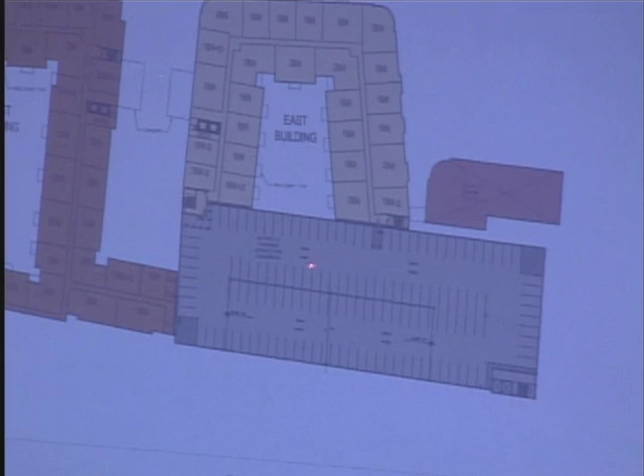Regarding the flat side of the garage: if you look at a typical level, the ramp to go from one level to another is on the track side. So if I was driving my vehicle, I'd come around on the flat section, then go up the ramp to hit the level above. What I meant was that this ramp is a compliant parking ramp per slope.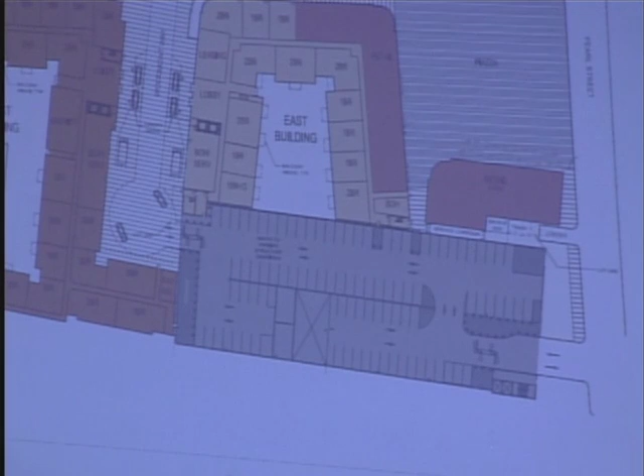Where we've allocated the bike storage, that's a solid wall in that location, so it would be a combination of the two. As far as the piazza area, we'll have some bike racks for those riding up. But on days when you need protected bike shelter or storage, would there be facilities on the ground floor proximate to the retail, so you could ride in, park your bike, and walk out to the retail space? That's something we can definitely consider in that area, even if we split it up.

So in the northwest corner, you're really accommodating the residents, right? And in the northeast corner, people that are riding in. Exactly, right, that's right. I think you've confirmed this before.

I just want to confirm, the parking for the residential folks is unbundled, right? It's not all included in the rent? No, it's month-to-month, so it's a separate option. Okay, thank you.

Other members of the public like to share their questions with us? Mr. Salmon? Hey, Bill Salmon, 23 Bounty. I just want to revisit, I think I missed the parking counts. The current lot handles how many stalls?

670 plus or minus, is that right, Mike? 670? And it runs at about a third capacity, is that what I heard? At one-third capacity, currently, what it operates at? Pretty much full, yeah. Full?